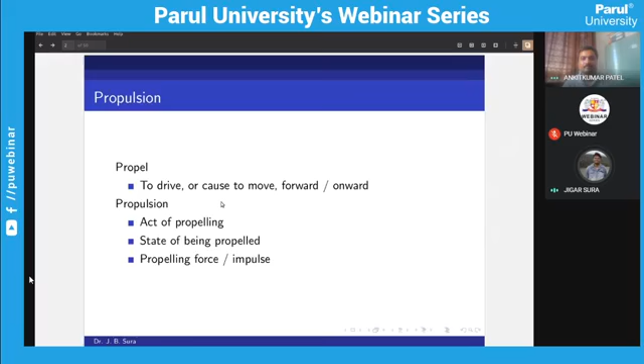When a kite is cut from the thread, it goes in any direction - that is not propulsion. We should have the desired direction of travel; that's why we call it propulsion. From there, the word propeller has come.

So for jet propulsion, there can be many means of propulsion - automobiles have IC engines, ships also have particular types of engines, aircraft also have particular types of engines. Anything that can give energy to go in a direction can be called a propulsion system.

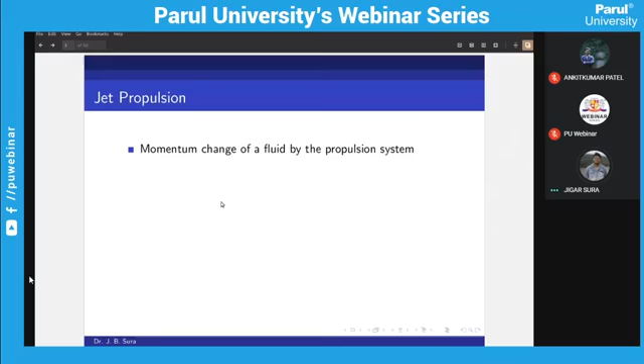Jet propulsion uses the principle of momentum change of the fluid. It takes in some fluid, changes the momentum, and Newton said that rate of change of momentum is force. You change the momentum in a given amount of time, and that determines how much force you get.

So two types of jet propulsion systems exist: one is called air breathing, another is called non-air breathing. Non-air breathing means we don't need air coming inside the system. Air breathing means we need air as a part of our propulsion system.

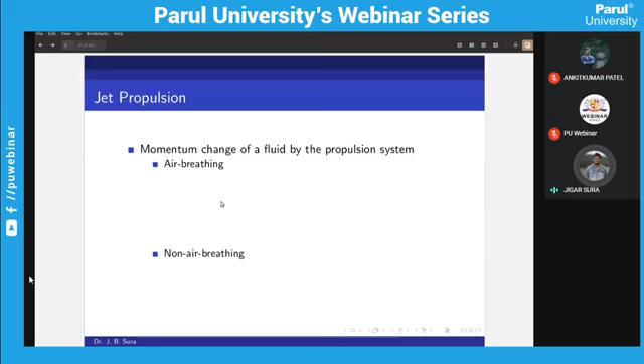In air breathing systems, all the engines that you see in day-to-day life are part of that - like IC engine, reciprocating engine, turbojet, usually good for fighter planes; turbofan, used by passenger jet planes; turboprop, mostly used by large cargo aircraft; turboshaft, useful in helicopter engines usually; and ramjet, the very high speed jet engine which operates at really high speed.

The things we're talking about - London to Tokyo in 2.5 hours, or London to New York in 2.5 hours - that kind of flight is possible based on ramjet engines and other variants of the ramjet engine. These engines need air as a property or substance to operate themselves.

But when we talk about non-air breathing, we have rockets, nuclear propulsion systems, or electric propulsion systems. Rocket motors carry their own oxidizer on board, so they don't need an extra supply of air. Some types of missiles also carry fuel and oxidizer on board, so they don't need air coming from outside into the system.

Nuclear propulsion - if you've seen Chernobyl - doesn't need any air to operate. It works based on uranium, fusion and fission type reactors, and all these things don't need air as an important part of the system.

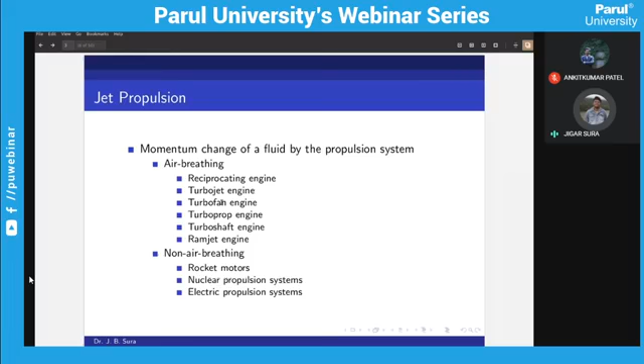Similarly, electrical propulsion systems generate ions, and ions are pushed forward, giving you thrust. So non-air breathing systems don't need air at all; they can survive like that. Air breathing systems do need air, so we cannot go to the outer edge of the atmosphere with an air breathing engine - we have to stay within the atmosphere, with 21 percent oxygen available to us at any time.

Based on the type of engine, there can be flight limits, or the envelope as it's called, that you can operate within. If you see on the screen, the helicopter has a minimum Mach number as well as a low amount of altitude. We know that helicopters don't fly at very high speed. They are not designed to fly at supersonic speed at all.

If you want to increase Mach number, you can use a piston engine, that is a reciprocating type of engine, and gain some altitude and some Mach number. After that, if you want to go further, you need a turbo engine, or turbine engine as they call it. The minimum speed is available with the turboprop engine, slightly higher than the piston engine, but it can go to very high altitude compared to the piston engine.

If you want to increase even further, the turboprop engine will not work. You have to go with a turbojet or turbofan engine. These can give you high Mach number, but you cannot operate them at very low altitude continuously, so the maximum altitude range available is quite higher than the turboprop engine. These engines are supposed to fly at very high altitude like passenger jets. They don't fly at 2000 meter altitude, they always fly at 8 kilometers and above so that your efficiency and output from the engine can be maintained properly.

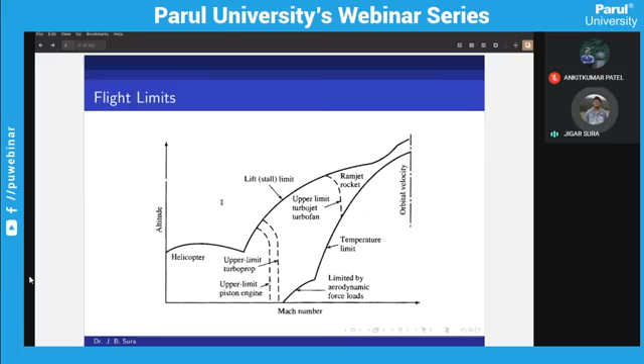If you want to fly at high Mach number, you need to fly at high altitude, because temperature there is very low and you can improve your Mach number. Based on the amount of air and the flight Mach number, there are certain limits. As we've seen, piston engines and piston-prop engines fly at minimum Mach number and minimum altitude.

Turboprop can fly at a little bit higher Mach number, but less than 1, and higher altitude, up to 50 to 60,000 feet. But at very high altitude, it can affect the performance drastically.

Turbofan has a good amount of Mach number range, it can go into the supersonic range and to very high altitude also. Turbojet is even faster than turbofan, reaching Mach number 3 or 4 ideally on design basis, and it can reach almost the same altitude as the turbofan engine. So altitude-wise, turbofan and turbojet don't have much difference, but Mach number-wise both have a difference because their core principle of operation is the same.

The ramjet engine does not begin at Mach 0. It will begin only at supersonic speed, close to 1.5 or 2 sometimes, to have efficient operation. It can go to very high Mach number like 8 and 10, depending on modifications of design, and ideally has no limit as long as oxygen is available.

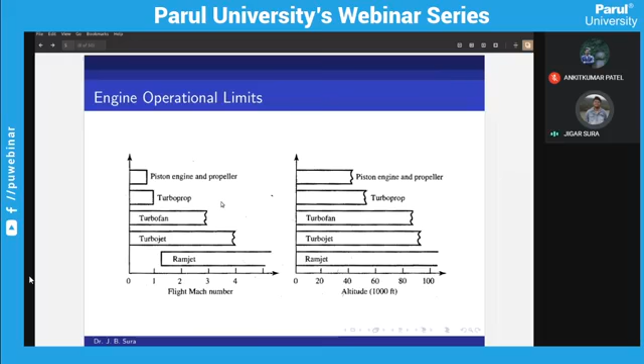1903 was the year we developed the first airplane, we flew the first airplane, or you can say the beginning of 1904. After that, people started thinking about jet engines. Earlier, the Wright brothers' plane used an IC engine, a reciprocating engine type. So in 1908, Lorin, a guy who designed based on the piston engine, created one jet engine.

The same person, after 5 years, again asked for a patent on a RAM-based supersonic flight jet engine, that is the ramjet engine. And in 1921, Guillaume designed some engine based on turbo machinery. So soon after the development of the first plane, people started working on improvement of engines.

If you talk about reciprocating engines, people are developing them, but it has reached a saturation stage where we don't see much development in terms of design. Maybe emission is reduced, efficiency is improved, but the fundamental design remains the same.

Similarly, even for aircraft engines, soon after the first aircraft flew, people started designing engines which were more capable, having more power. But these were not known to anyone at that time, since they did not have Google or internet in that era.

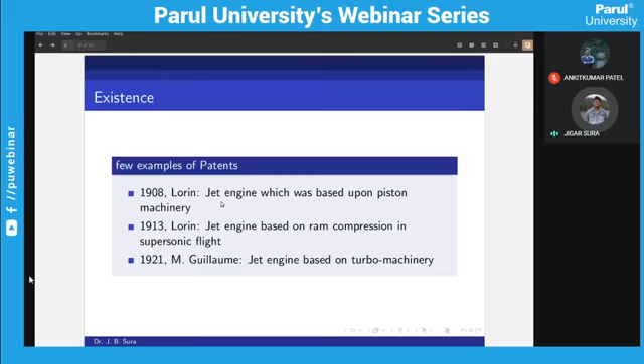So the first patent for a turbojet engine was applied in 1930 by Frank Whittle. He was from the UK, and he was actually in the UK Defence Forces. He died in 1996. So he is the first person who filed a patent for a turbojet engine.

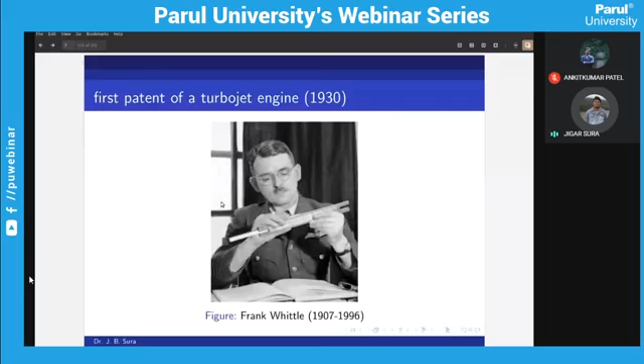He did not know anything about previous patents at that time, and people had lost interest in his patent in that earlier era, but later on it was developed when they found that it is suitable and they could go ahead with it. So it is actually Sir Frank Whittle, the person who is responsible for the first engine from the UK.

The other person, outside the UK, was Hans von Ohain, the one who has written so many books on gas turbine engines. He also died, in 1998. So both were born in the same era, both died close to the same time, and both are the first persons to develop the jet engine.

The only thing was their idea was different. During the 1930s, it was not known to other countries whether somebody else had filed a patent or not. So neither of them ever knew whether the other person was working on the same type of system at the same time. So we can say both of them are responsible for designing the first gas turbine jet engine. And he, von Ohain, was German, by the way.

After the development of the first engine, or successfully flying the first engine, people started developing it further. What were the goals? What is required to achieve? What do we want to achieve in terms of the engine?

First, overall efficiency should be higher. That means thermal efficiency, propulsive efficiency, or any other efficiency coming from the engine should be as high as possible.

Larger power output is needed. If you get low power output, it's useless. Like the Airbus 380 cannot fly with small engines. You need large engines on the Airbus 380. Even the largest engine that has been used for the Airbus 380, they need four of them.

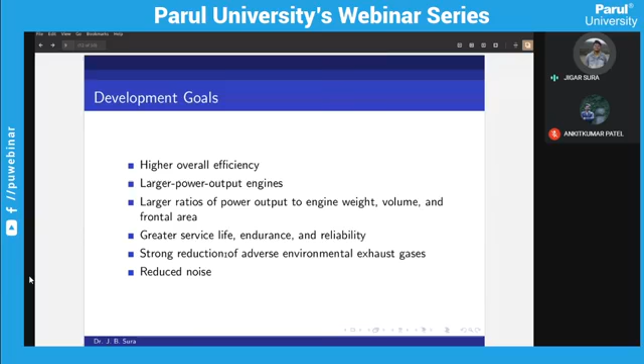Even in the European Union, there are certain countries which do not allow you to land during the night time. That's why we have flights taking off and landing in the middle of the night in India, to reach there during the daytime.

So the compressor is an important part, the one that you see when you are standing in front of the engine while you board the plane. That is the most important part of any jet propulsion system because it is responsible for giving you the high pressure air ultimately. In the beginning, it was hardly a 3 to 5 compressor pressure ratio, meaning you give 1 atmosphere of air and it gives you 3 to 5 atmospheres of air, which you can easily get nowadays using a centrifugal compressor from the market.

After that, when they started development on material, they learned about aerodynamics and structural integration and all these things. It improved. After 1940, it reached a 5 to 6 slight improvement. Then after the next 10 years, it reached about 10 to 1.

Once we developed proper aerodynamic methods and material development like composites, high temperature alloys and lightweight alloys, it increased a lot, to an amount of 20 to 25, and even in the current era we go up to 30 to 40 pressure ratio. So you provide 1 atmospheric pressure, you get 40 atmospheric pressure as an outlet. So within 70 years, we started at 3, we ended at 40. That is more than 12 to 13 times higher than the initial one.

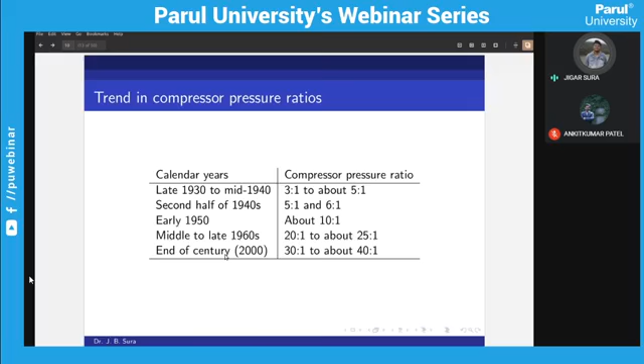Earlier, before the 1960s, we started in 1940 up to 6, 1950 up to 10. Then people did not talk about bypass ratio, the one that we see in our normal passenger jets nowadays. But in the beginning of the 1960s, the American Air Force asked for a typical type of engine for its cargo plane, and in 1964, General Electric developed this engine, the TF39. If I'm correct, it is used in the C5 airplane even today.

So that was the first time we used high bypass ratio turbofan engines. They are very efficient and can carry a lot of load on board. When you have to fly at subsonic speed, then it is widely used. Any passenger jet, Boeing or Airbus, that you see today, they all employ bypass ratio turbofans. Fighter jets have very low bypass ratio. Bypass ratio means a certain amount of air is bypassed around the engine. It is not going into the engine core, but it is bypassed in a particular way so that you can get more thrust or more efficient thrust.

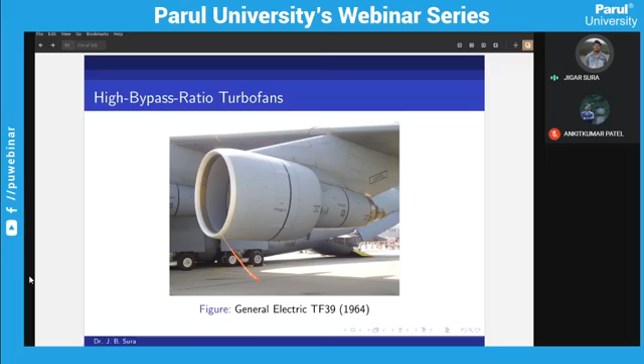So what was the requirement raised by the American Air Force during that time? They needed very high compressor pressure ratio, somewhere between 20 to 30. And they were ready to use novel technology like stators and dual rotors. Dual rotor means you have two rotors rotating, one called low spool, one called high spool, or low power and high power. That way you can improve the performance. Instead of compressing everything in one go, you divide the compression process into more than one stage so that your overall performance is improved.

And they wanted to employ very high turbine inlet temperature. What is the implication of turbine inlet temperature? If you have very high turbine temperature, you can get more amount of thrust. You will come to know this when you learn the fundamentals of propulsion during your study.

Very high bypass ratio means the engine is a little less noisy and exit temperature will be a little lower than a normal low bypass ratio engine, and it will improve the overall performance of the engine. That's why it is needed. If you talk about a fighter jet, when you employ high bypass ratio, your exhaust gas will have relatively low temperature. Because of that, your heat signature can also get reduced. Otherwise, a normal turbojet engine, if you calculate, you will get about 700 to 800 Kelvin as the outlet temperature, which is very high.

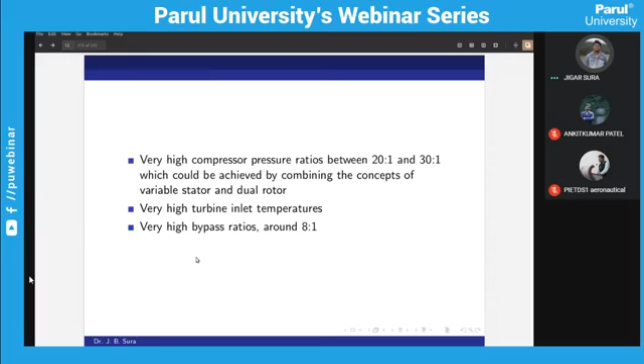So jet propulsion is made up of turbojet, turbofan, turboprop. What are the components and what type of design do they take? The fundamental unit is the gas generator. The gas generator does nothing but generate the exhaust gas, nothing else. So what you see here is the compressor, which compresses the air. It goes into the combustion chamber, just like the compression stroke, then you have the power stroke in an IC engine. In the combustion chamber, you burn fuel with air, and then you get high temperature, high pressure air, which is expanded through the turbine. Turbine is the power generating unit. Compressor is the power consuming unit.

Once we expand it through the turbine, it will generate some energy to run the compressor directly. In aircraft, they are directly connected, and it will keep on rotating. Whatever remaining gas is there, it can be used for heating water, in a boiler, or in some other manner you want. Here we don't talk about using the exhaust gas directly; what we want is to run the compressor. You can connect this compressor with some pump and run it, and your pump will keep on working.

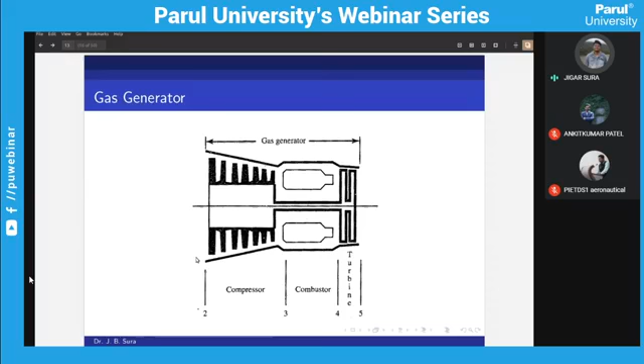Like in a rocket engine, you need turbo pump systems to supply fuel and oxidizer to the combustion chamber. If you remember, diesel engines need a pump, petrol engines don't since they are usually gravity fed. So that kind of pump needs some energy to run it, and it can come through this kind of gas generator.

But in a gas generator, if you add an inlet and a nozzle, both are opposite in design - in any case one is divergent, the other convergent, depending on the speed you are flying. So it becomes a turbojet engine. A gas generator added with inlet and nozzle gives you a turbojet engine. The inlet helps you get a pressure and temperature useful for the compression process and improves your output. The nozzle expands the flow, generating high velocity gases, converting pressure energy into kinetic energy, and you get the thrust.

Now this was the earlier era, 1935, 1940.

This exhaust gas can be of very high speed, going up to 500 meters per second or even more, even on the ground. If you read any aircraft maintenance manual, you will find they don't allow you to stand within a certain distance behind the engines. This is one reason we don't board from the backside of the plane. If you visit any airport, the plane's cockpit always faces the boarding gate, because if they switch on the engine, even for idling, the hot gas can damage the boarding gate window glasses.

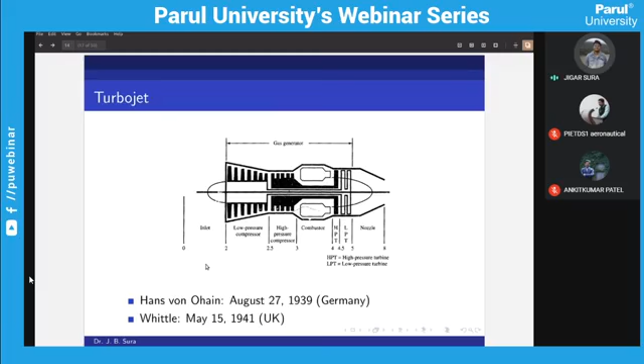Now you have some thrust, but we need more thrust. Just like you have a supercharger or turbocharger in your four wheeler, we have the afterburner. After power is extracted to run the compressors, you still have some hot air available. You put some fuel into that and you get more thrust.

Afterburner nowadays is part of fighter jet engines like MiG-29, Sukhoi 30, F-16, or the new Rafale. Almost all fighter planes switch on the afterburner during takeoff because it generates very high thrust, so they don't need a large distance to take off. During a dogfight, if they want to get away from an enemy coming from behind, they can switch on the afterburner and get very high speed suddenly - it's like a sudden jump, as simple as that.

But it consumes a lot of fuel - your fuel requirement increases by up to 50% when you switch on the afterburner. So they don't fly with the afterburner continuously; when they need it, they switch it on for the time being and then switch it off.

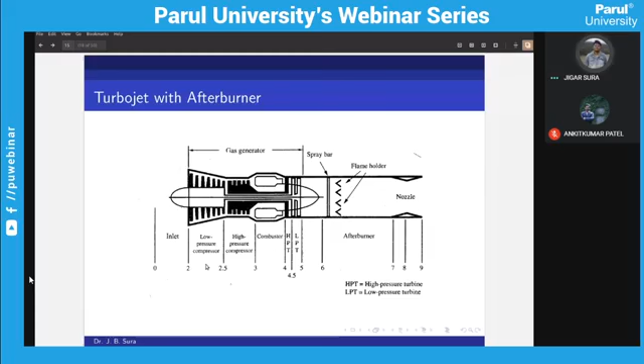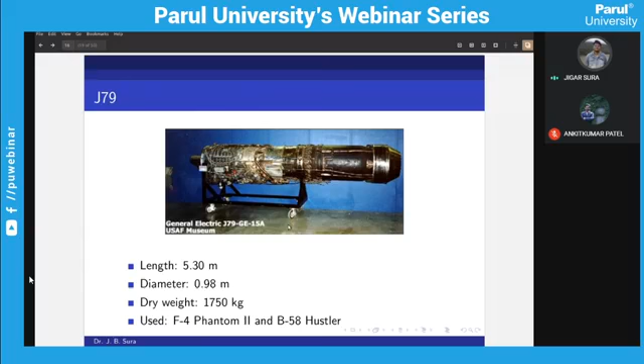After 1964-65 came the era of high bypass ratio turbofan, which is still continuing even now. That is, you take some air, but you bypass part of it. You compress it before bypassing so that it also gives you thrust. That is known as cold thrust, because you don't burn that air with fuel. The other part is known as hot thrust.

Now the benefit of this is you can have the engine cooled, like a radiator. That air passes over the engine so the surfaces get cooled down. Second, that air does not contain exhaust gas, carbon dioxide and water, so you can use it for the cabin also, like AC purpose and breathing. We need it for passenger comfort. So that is also how it is useful.

Depending on design, they can either take air from the compressor or from the bypass. That depends on the design and their requirement. So nowadays, all passenger jets, again I'm telling you, use high bypass ratio engines.

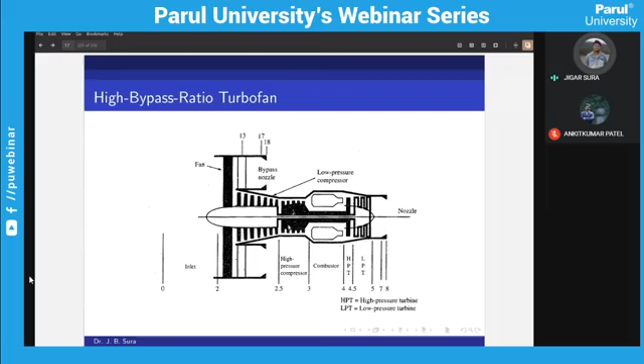So the one you see when standing in front of the plane can go up to 20 feet diameter for the larger ones. Inside that you will have a very small core. As you can see from the figure, the diameter of the core region is almost half the diameter of the fan. This fan operation is also important because it helps reduce the noise ultimately.

So once they make one engine, it is useful for many aeroplanes, and sometimes development of the engine takes the same time as development of the aeroplane. Engine development is a totally different process, but it can take the same time as plane development. So if it takes 10 years for one prototype to come out for the aeroplane, it can take 10 years for the engine manufacturer to design the engine for that particular plane. But once developed, you can keep modifying it and improve the performance.

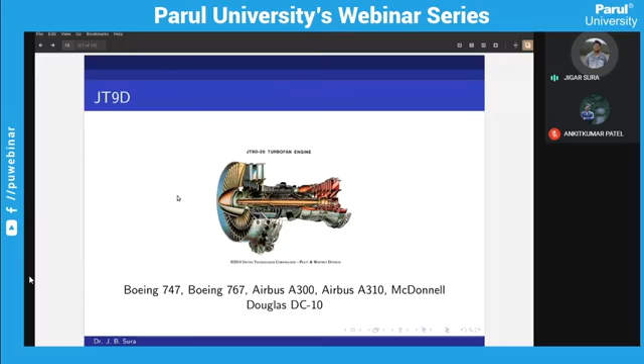Once you are done with the low speed turbofan, you want to go even lower than that. You don't need very high speed close to 400 or 500 kilometers per hour if that's what you want, like in a cargo plane. It's like, as you increase your loading, your top speed reduces, like a truck and a bike. A bike cannot carry 3 tons of concrete, but a truck can. And the truck is not supposed to be driven at 120 kilometers per hour on Indian roads, but a bike can easily ride that way.

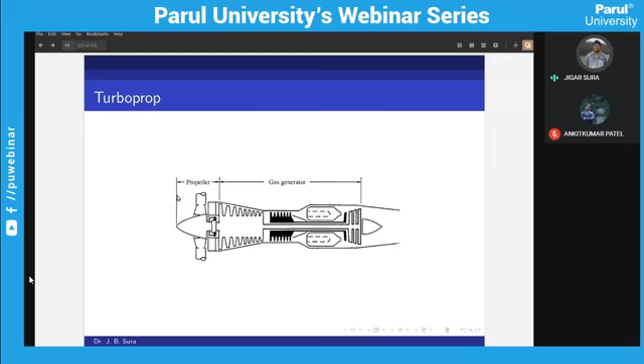So the turboprop has a gas generator only, with a propeller system added. Similar things can be useful for ships also, but propeller design for a ship is totally different than propeller design for aircraft. The loads are different and the working environment is totally different.

So these engines, turboprop, turbojet, turbofan, they are longer engines. But if you want to compact the size, when you don't have the space like on a helicopter top, then you can use a turboshaft engine and generate a good amount of power and get away with that.

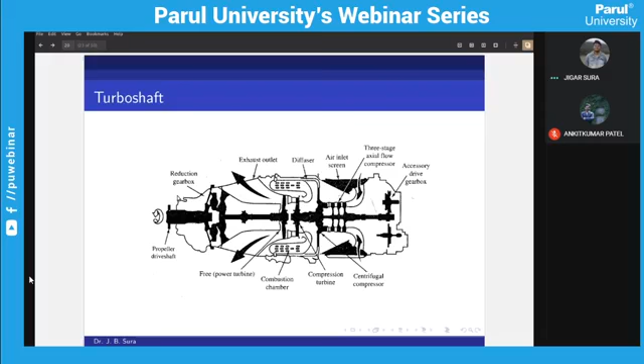So in turbojet and turbofan, we rely on thrust, that's why we don't want to compress and take out all the energy from the gas. But in turboprop and turboshaft, we don't rely on the exhaust gas too much, so we can reduce the size somehow and get things done.

The easiest to manufacture, yet difficult to make, and ideally the one that should have been designed first, but hasn't been perfected yet, is the ramjet engine. It's a controversial thing - it doesn't need a compressor, it doesn't need a turbine. What does it need? A duct. The inlet is a duct, there is no component. The combustion chamber is a duct, there is only a fuel sprayer, a fuel injector, and the nozzle is also a duct without anything inside it. So it is the simplest design, but it has not been developed successfully in the commercial world yet.

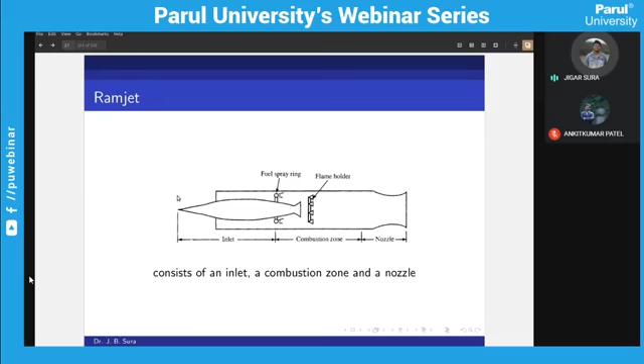It is known as ramjet engine. Once you are in supersonic region like Mach 2, Mach 3, you cannot have a compressor which can compress air coming at that speed. Even if you try to compress, it will reduce your performance ultimately. So people have developed ramjet engine which compresses the air just because of ramming effect, like sand is rammed for construction of a road, so that the space is reduced between molecules. This engine combined with turbojet engine has been used in the SR-71 Blackbird. It is known as turbo ramjet engine and it is able to fly at Mach 3 plus speed at very high altitude.

So the components we talked about, inlet is there, compressor is there. These are the components. So what they do and what they look like, just an intro for you people.

Inlet: the purpose of the inlet is to reduce the air velocity to the level where the compressor can take it. Its operation and design affects the compression process. It has to reduce external drag and the mass flow into the inlet should be maintained. So in your bike or car you have air inlet through a filter. If you choke the filter, ultimately your engine performance will go down. Here you don't have an air filter system, but the performance affects your overall engine a lot. Inlet and compressor, they are going against nature. We are slowing down high speed flow and it is difficult to control that.

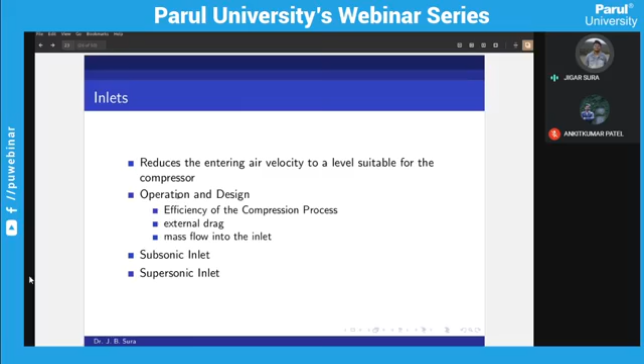Based on your speed, you have two types of inlet. One is called subsonic, one is called supersonic. When you fly at low speed, lower than sound speed in air, you can call it subsonic. When you are flying at speed higher than sound speed, you can call it supersonic. The design of both inlets is totally different.

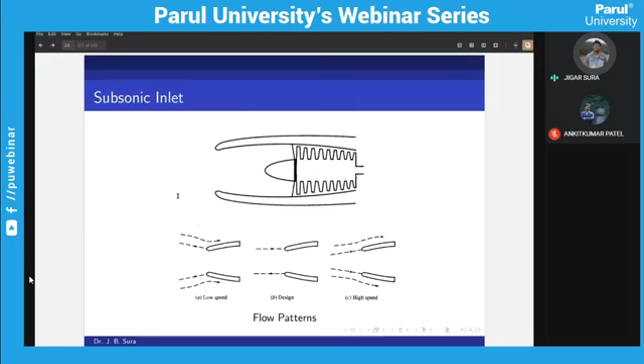Subsonic inlet, it looks like this. Passenger jets that we see are supposed to operate at design speed, and at design speed it will have maximum efficiency of compression. When you travel at lower or higher than that speed, your efficiency is reduced. Please remember, in aerospace engineering or in aircraft, there is not a component which is designed to run at other than design point. We expect that all components are to be operated at design point only, maximum time.

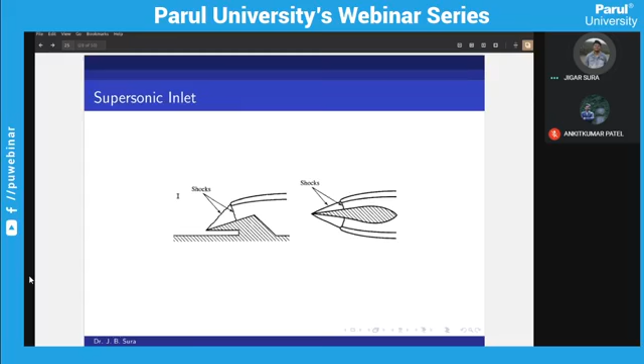So what happens when you have a supersonic inlet? You have to fly at subsonic speed first to reach supersonic speed. So when you are in subsonic region, the inlet will degrade your engine performance. And if you are in supersonic, it is okay. So if you have a supersonic inlet design, don't waste your time flying at subsonic speed.

Compressor: they are useful to increase the pressure, the one that we use in a cycle shop or garage also. Compressor increases the air pressure. It provides the air for the combustion process in a way so that your power extraction process is more efficient. So the compressor has to provide high pressure, and not only that, it will provide it in a way so that your combustion is efficient.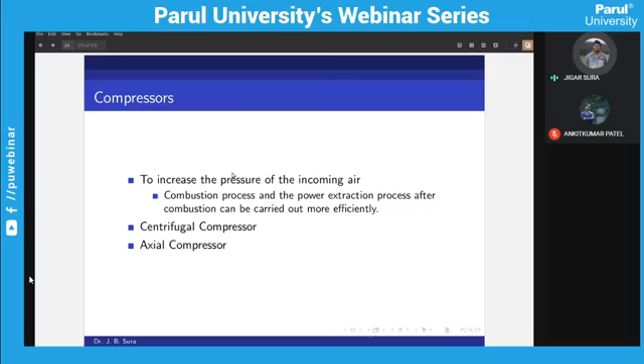Two types of compressor are used: centrifugal and axial, but in passenger jets we mostly use axial flow compressor nowadays. In certain small aeroplanes we still can have centrifugal compressor as part of the gas turbine engine. So yes, centrifugal compressor is nothing but the pump in your home, motor, water pump, or engine, similar to a submersible. Even if I am correct, I have not seen the submersible, but that kind of thing is the centrifugal compressor. Even a hair dryer will have that thing.

Only three components: impeller, diffuser, and manifold. Impeller rotates, diffuser increases the pressure, manifold collects everything. That's all, and these are robust in nature. Operating range is very high, but it will create high frontal drag. So frontal area is more, so we don't use it in aeroplanes - that's the major reason.

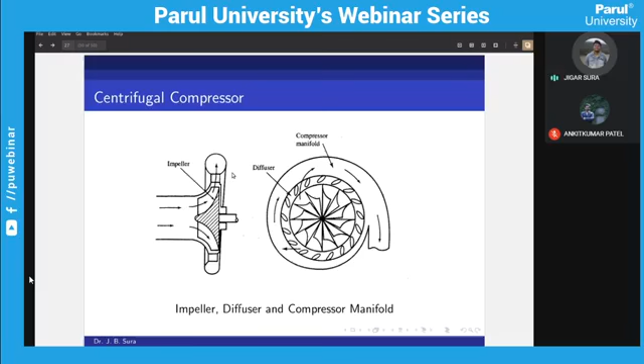But axial flow compressor has more stages, that means you have more components to fail. One is called rotor, the left one; the middle one is called stator. Once you combine them together, your axial compressor is done. So manufacturing of axial compressor is a costly affair because it works on aerodynamics of the compressor blades also. But it doesn't have a larger frontal area, and operation range is limited, but when you are operating near your design point, your life is easy.

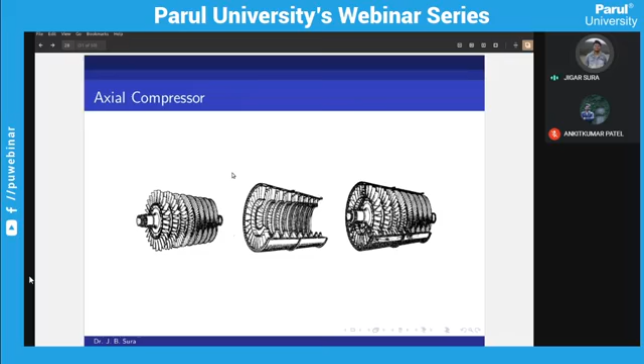Then combustion chamber or burner. You burn everything. After you complete your compression stroke, you reach the power stroke area, you burn everything. Whatever air is coming, you put your fuel, burn it, but make sure the gases exit at uniform temperature. Imagine you have a gas stove at home, half the burner is burning gas and half is not working. What will happen to your vessel? So uniform distribution of temperature is important for combustion chamber design.

Whenever you burn something, you have pressure loss. When you design your burner, it is a totally different subject in propulsion, combustion chamber designing. Your pressure loss must be minimum. Combustion efficiency must be high, in the order of 95 plus or even 99 plus. The burner should not blow out.

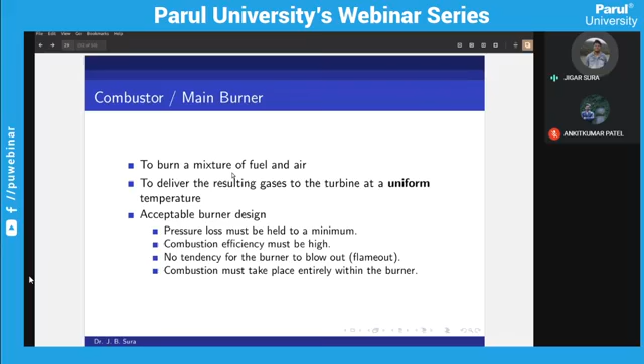So if you don't know how the compressor works, if you don't know how the turbine works, you still have the opportunity for your career in combustion chamber design.

Remember, aerospace engineering is one branch of engineering where development happens first and then it is given to civil purpose. Just like for space technology, HD and LCD came, all these things came for space technologies, then were given to civilian people. Here also, the turbofan engine, high bypass turbofan engine, came for military purpose, then was given for civilian purpose.

This is a burner where flow is coming straight from the left. You put some air and fuel, it will burn, and ultimately it will heat the turbine stator and turbine rotor, making the turbine rotate. Just a schematic for you. So not only should the air go to the turbine, it should also make the turbine rotate. It is already at high pressure — if you lose pressure during the combustion process, your game is over.

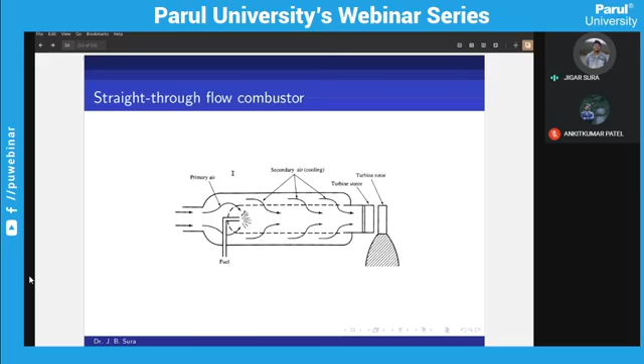Then comes a turbine which faces all the heat, continuously operating in hazardous conditions, like 1200, 1300 Kelvin temperature continuously. If you fly 10 hours, it faces that temperature every second, continuously, without forgetting even a second, even a millisecond. Its purpose is to take the kinetic energy from the gas and convert it into power.

That power is used to run the compressor or accessories like the refrigeration plant of passenger jets, or any other equipment requiring energy — they will connect it to the turbine through some system and get it.

At high speed, meaning 1000 Kelvin temperature running at 10,000 to 15,000 rpm, the design of the turbine is dependent on rotational speed, how much gas is coming, what inlet and outlet temperature and pressure you expect, exhaust velocity that you want, and the required power output needed. All these factors together affect your turbine design.

But for 10 stages of compressor, you may need only one or two stages of turbine. So the turbine area is very small compared to the compressor area.

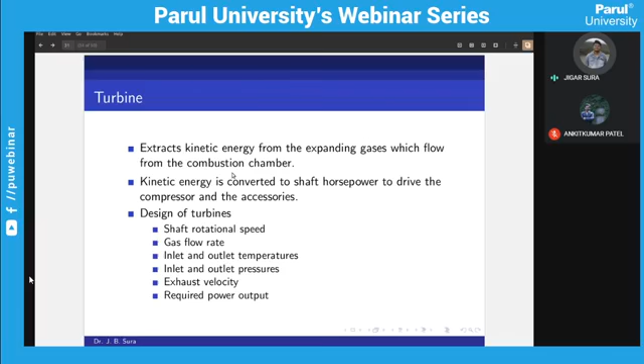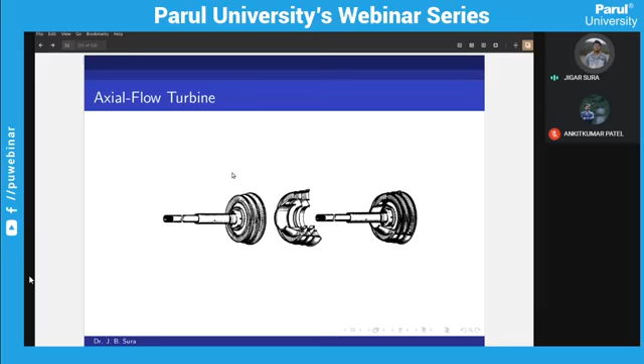Just like axial flow compressor, you have axial flow turbine. Same way, you have rotor, you have stator, put together, you will get a turbine stage. Again, its design is also from aerodynamics point of view. So propulsion is not a totally independent branch, it connects to aerodynamics also. There are two types of stages that you can design for the gas turbine, this jet engine turbine.

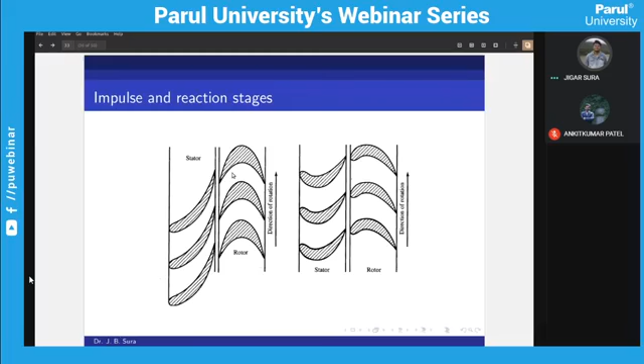One is called impulse, which is on the left. One is called reaction, which is on the right. Impulse means it just changes the direction of the flow, but reaction means it generates reaction force on the aerofoil blade, and you get your rotation. So based on the requirement, again you choose which one you want to go for. You can go mix of that also. It's totally up to the designer and requirement.

Finally, once you are through everything, you have to go out of the engine, that is the nozzle, the exhaust nozzle. It increases the velocity, it straightens the flow. Subsonic will have convergent, supersonic will have convergent-divergent nozzle. Again, it is a simple duct, but just like your hair dryer or blower, you have one connector in front of the exit, and it will give you the velocity at desired area based on the direction, based on the size of the adapter that you can put.

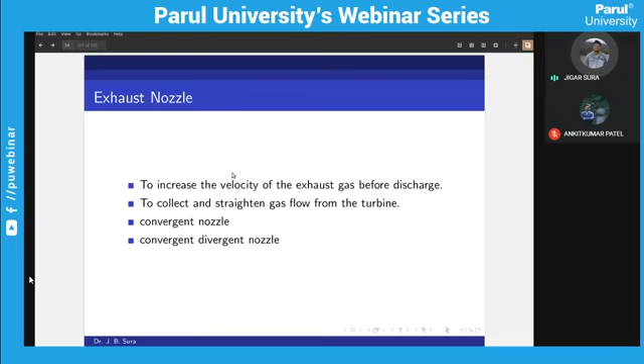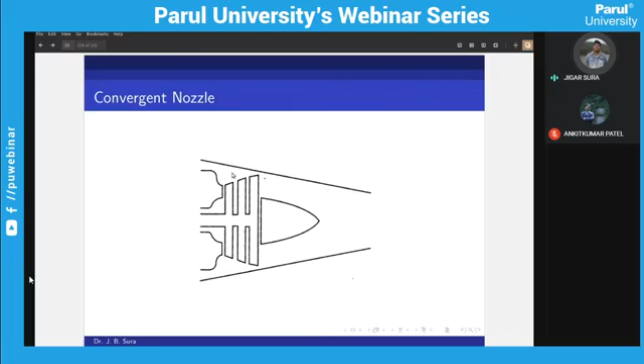If you have an afterburner, then it will come after the turbine, before the nozzle, and then after you have the exhaust nozzle. So convergent nozzle looks like this. If you stand behind the engine when it is parked, the plane is parked, and if you go behind the engine, you will see like this. That is a convergent type of nozzle for a passenger jet.

But supersonic, it is difficult to understand because it can have variable area. It has to fly subsonic, fly supersonic, so it can have a variable area region, and the design is quite complex. You need a mechanism to operate that. So think about the mechanism which is being operated at 500, 600 degrees Celsius with the surrounding temperature continuously.

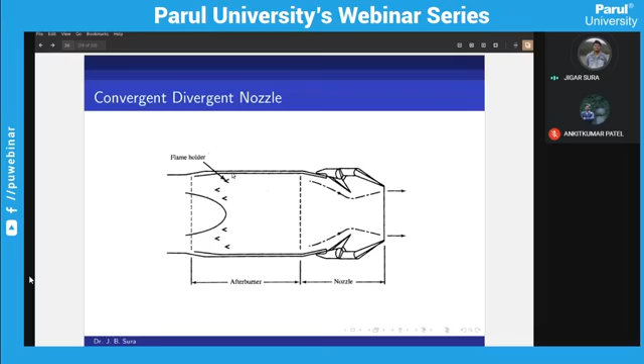So optimization and efficiency in operation is important for any aerospace component. But propulsion and aerodynamics, they have to go together. You can have the best of the engine, but you cannot have the best of the plane which can use that. Or the other way around, you have the best aerofoil geometry, aircraft geometry, but you don't have the engine to operate that. It should not happen.

There are various ways by which you can improve your thrust, just like switching on a turbocharger for a while, or a supercharger in supercars. So one is called water injection, which is used in the compressor, where you spray some water, which will reduce your compressor work requirement, and ultimately it will give you more thrust. But for this you will have to carry water additionally, that means added weight for the aircraft. So your power to weight ratio is slightly reduced.

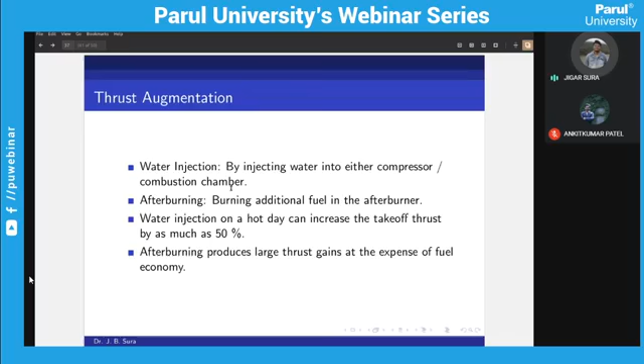Afterburner, as I said, you burn the fuel in the afterburner section. It is a permanent part of the engine, you cannot connect it whenever you think you need it for the mission. Water injection can increase your thrust by something like 50 percent. And afterburner produces thrust at the expense of fuel, so it depends on that.

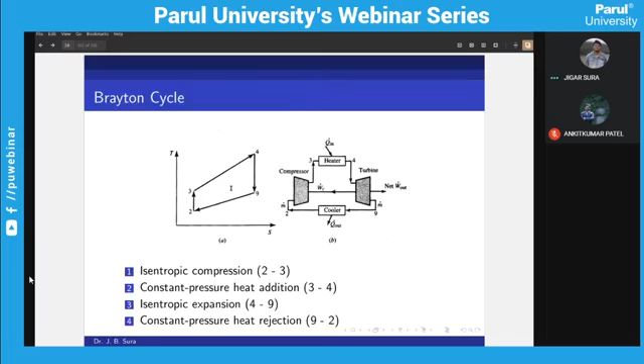Now this is the cycle that works behind the generic gas turbine engine for jet propulsion: compression, then you add some heat, then you expand, then you reject the heat. And thermal efficiency, if you want to see based on the pressure ratio of the compressor, it is like this: higher the pressure ratio, higher is the efficiency. But after a certain value of pressure ratio, like 30, it doesn't improve much, it becomes almost a straight line after that. So increasing the compressor pressure ratio does not mean that you will have too much improvement in your overall performance. So you have to stop somewhere.

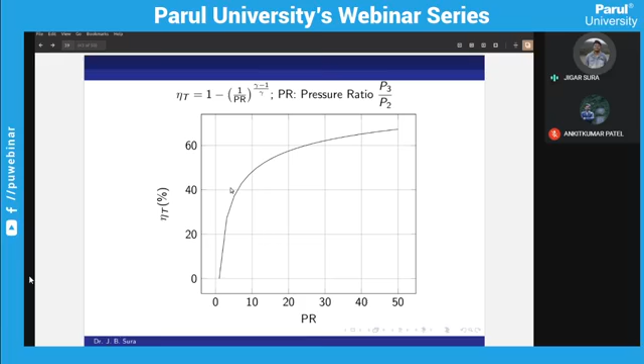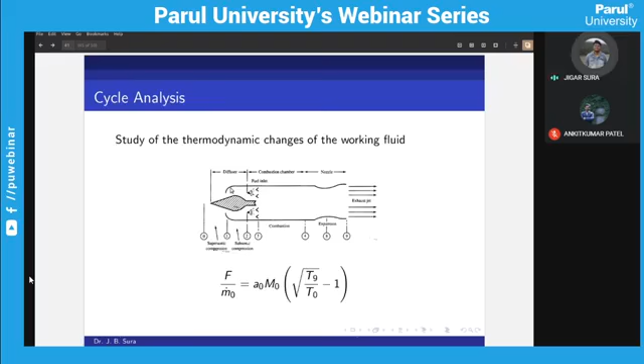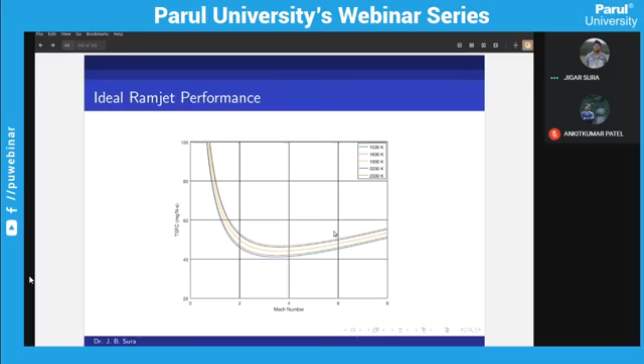So this was a very basic idea about why jet propulsion is useful, why you should learn it. You can improve any component. There are people who have done PhD only for inlet design. Even the lip of the engine, cowling, people are doing research. You can take any small topic - flame holder, compressor blade, compressor rotor-stator interaction. People are working on just 1 mm of gap between rotor and casing. So you can take any of these topics for your research, for your understanding, and you can make your career in propulsion.

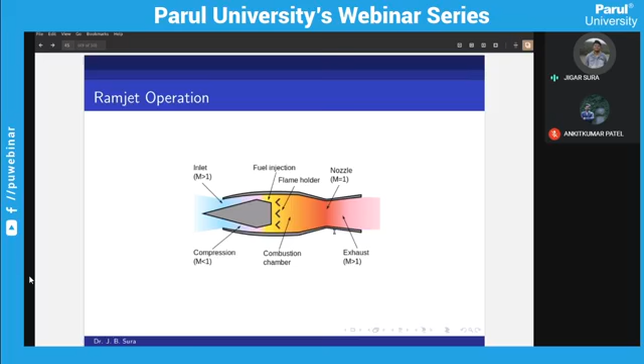There are not many companies that make gas turbine engines in the world for aircraft. You will count them with your own hands. Maybe you will not be able to name all the companies, but you can study if you are interested in jet propulsion. And jet propulsion requires fundamentals of thermodynamics also.

So I included that. Now I will conclude this. You can make your career in jet propulsion. There are certain colleges in India for masters if you have already done BTech, and it is one of the most beautiful branches of aerospace engineering. It's like that - your creation will remain there for 20-25 years, like an engine. So that's all from my side.